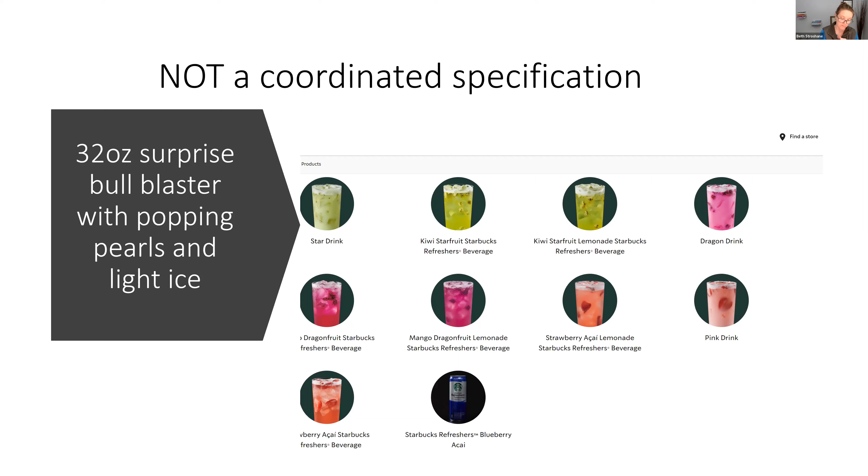It's one of those things that's going to stick in your head forever: coordinating specs and drawings is just like playing Go Fish with a toddler. No disrespect meant to anybody in this industry. How do you win at Go Fish with a toddler? You find all the matches. That's how you win. Doesn't matter whose pile they're in, doesn't matter if you find all the matches and none of them are on the floor.

So how do you get there? You say, architect, I have a spec—you have to read 600 pages to find out which fish I have. And then the architect says, okay, here's my 700 pages of drawings, find my fish in those.

So really what we do, and every spec writer has a similar process for this, is how do we play Go Fish with a toddler? We play the cards face up. Like, here's my table of contents, and these bluefish, they usually go in the tile section—do you have any bluefish? Yes, I have bluefish. Okay, how many? Four, big ones and little ones. Excellent, so we've got those matched.

And then we move on to the next thing, which is doors. Oh, I have big doors. Okay, got big doors, little doors, doors that open and close and swing in and out.

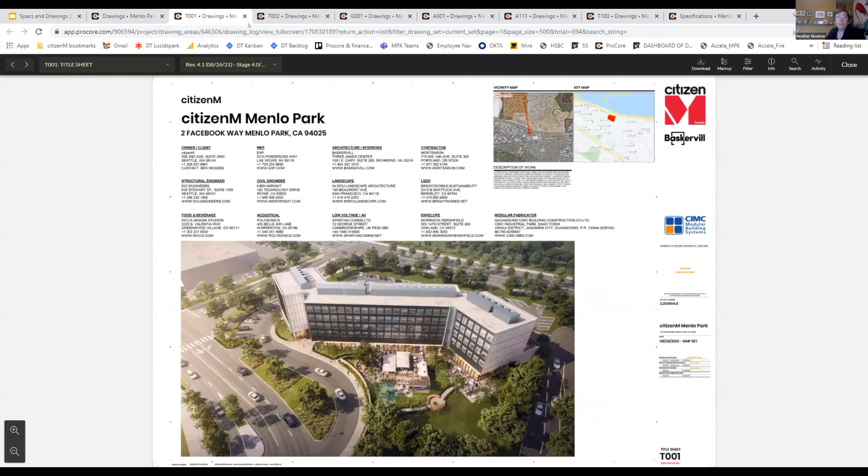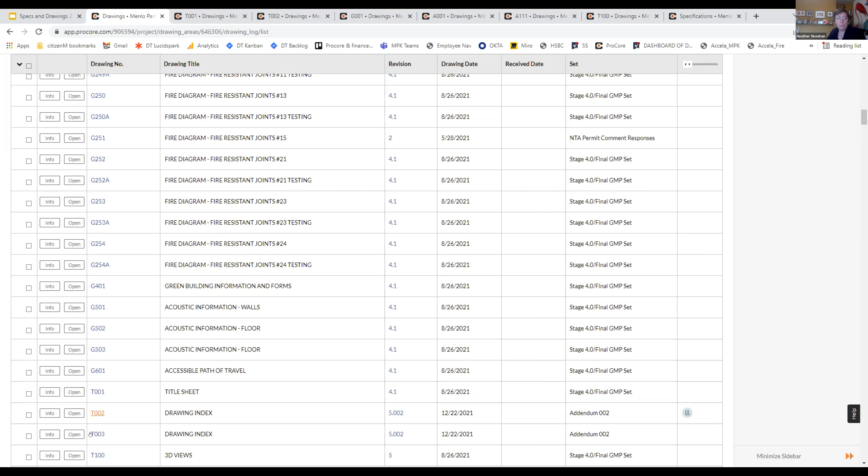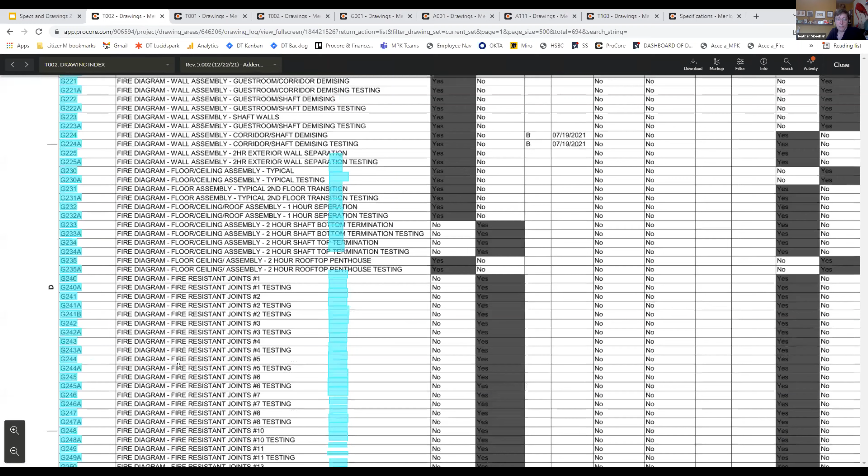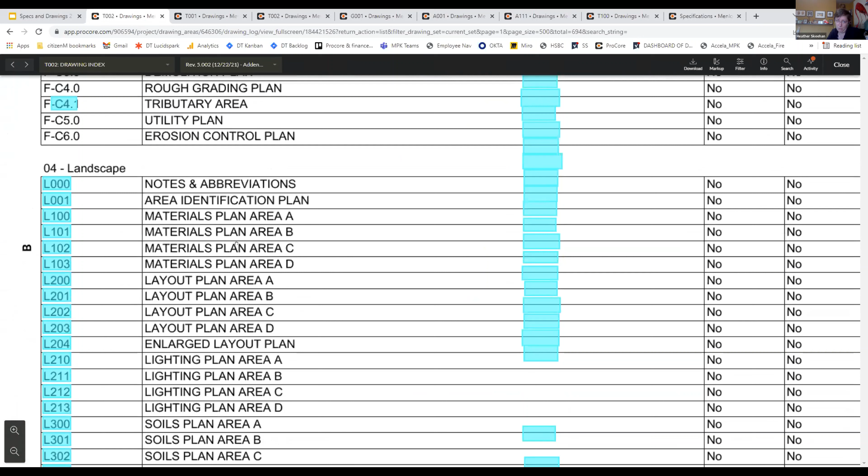And like I mentioned, there's a lot of them, so knowing your way around can be a challenge if you don't know how you're doing it. The good news is every project has a title sheet - oh, that's one of these, see, I don't even know where my title sheet is. Every project is going to have a drawing index, so if you really want to, you can go straight to the drawing index and go down the list to try to find the one drawing you're looking for amongst all those fire diagrams, because one of those is bound to have something interesting - and dig and dig and dig. So there's always a table of contents option available.

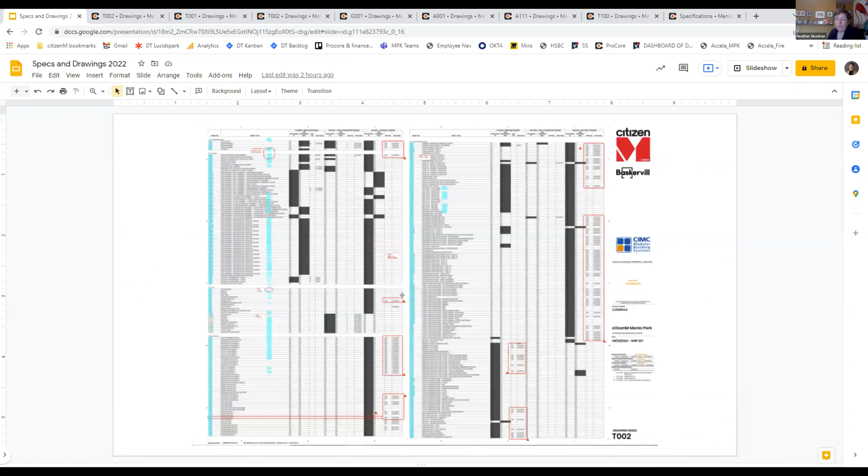Now, what's nice is that there's a cheat sheet on every set of drawings. Down at the bottom, you're going to have a little reference to all this information. Many design firms will have a cheat sheet on one of your sheets that explains how you navigate around. Looking down at the bottom of your title block, which is so much more useful with a big printed set on your desk where you can just flip through the corners, it'll say if it's A, that tells you what discipline it is. If it's 0 next, that's your view type—general, schedules, plans, elevations, details, etc.

Then it'll have the view type modifier to give you more information, and it'll have the sheet sequence right there. There always should be one. We very much like it when there's a cheat sheet built into your drawings. In this case, my architect was fabulous and put it right in the first few sheets of the drawing set. Makes it easy for me to figure out what the T or the P at the beginning means. So I can always find it that way.

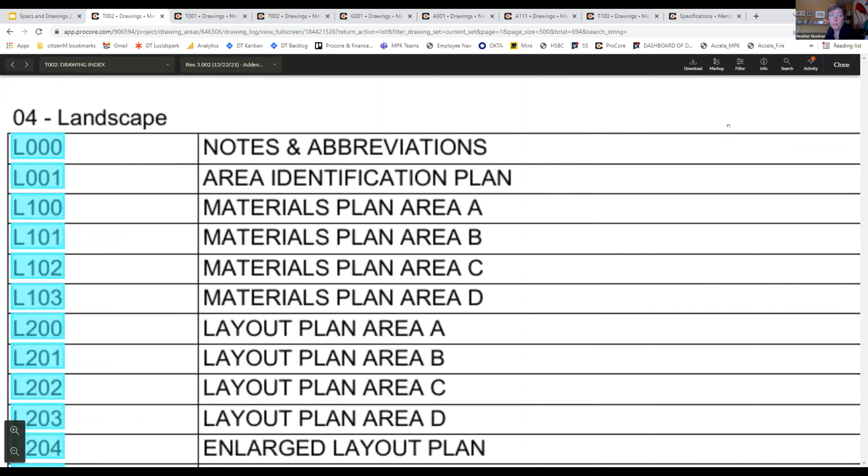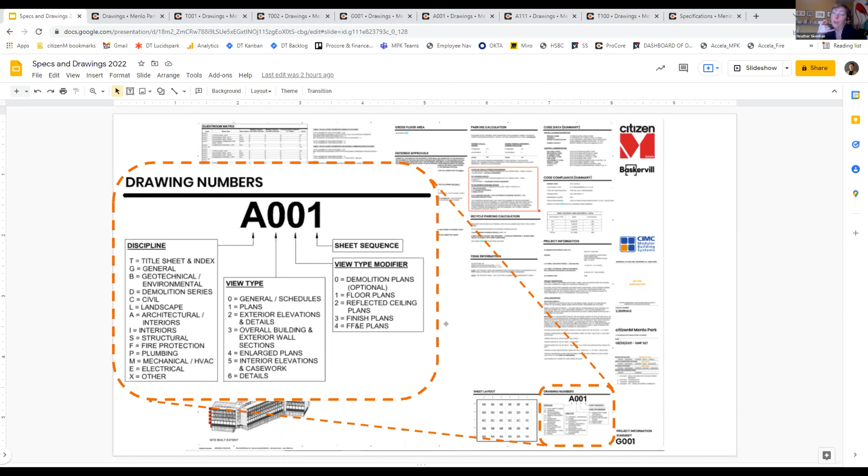Now what's also interesting is increasingly we're using systems like this—this is Procore, one of the drawing tools I use. Even more so now, if you have a design team using a tool like this, I love just searching for furniture—I apparently search for furniture a lot—and I'll search for things. This is another option that's way easier if your team happens to be using it; you can always find your way around right here. So that's the first thing you need to be able to do, hunt it down. If it's confusing or not matching up, a call to your architect is the best thing you can do, because if you're lost, I assure you they're lost too.

There are national standards that exist out there—national CAD standards, AIA has standards, and that's great. But there's also firm standards, so ZGF has slightly different standards than maybe Gensler would. And owners were really problematic—we have standards at citizenM that vary from country to country that we're working in. Microsoft has extremely specific standards; they say you will use these numbers, and you end up with a drawing number that's like 6 digits long. It gets really enormous. So it's going to vary a lot.

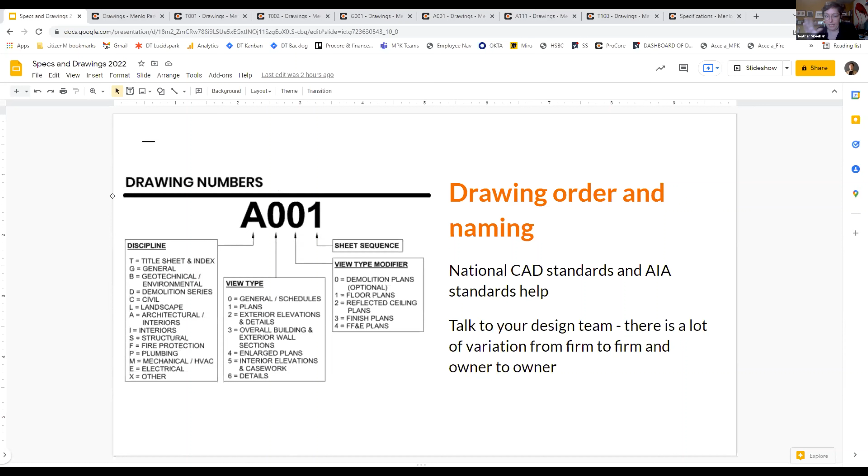So I wouldn't worry so much about national standards, and I'd always hope you have one of these cheat sheets in your project—it'll help you endlessly. That's how you find bits and pieces of stuff. Once you know where to find the architectural drawings, where the civil drawings are, and the basic format and order of these things, the next thing is what types of drawings there are and what they're for.

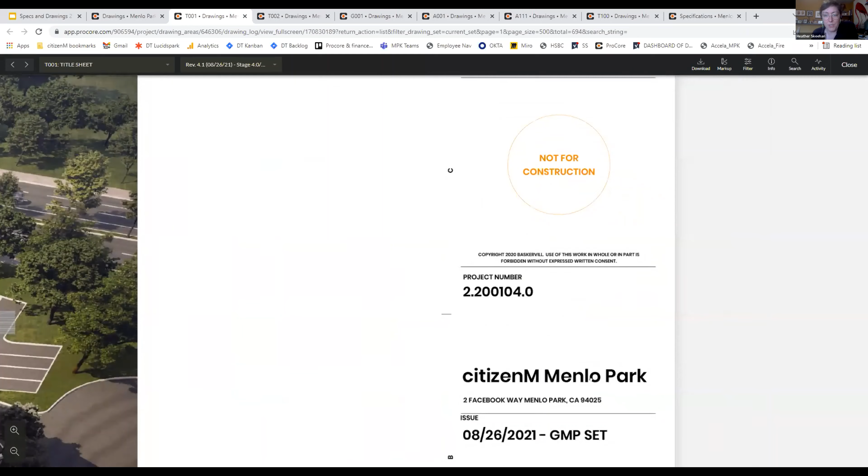All of them are going to be set up in basically the same way. You're going to have a sheet that looks like this, with this big area over here, which we call the drawing area, that'll have the stuff. It'll have this area off to the right-hand side, unless you're a weird firm that does weird things, that'll have information about the project—who this is for, the architect, a space for the architectural stamp. I'm going to zoom in here. There'll be a space for the stamp, and there we go—there'll be a project number and the project.

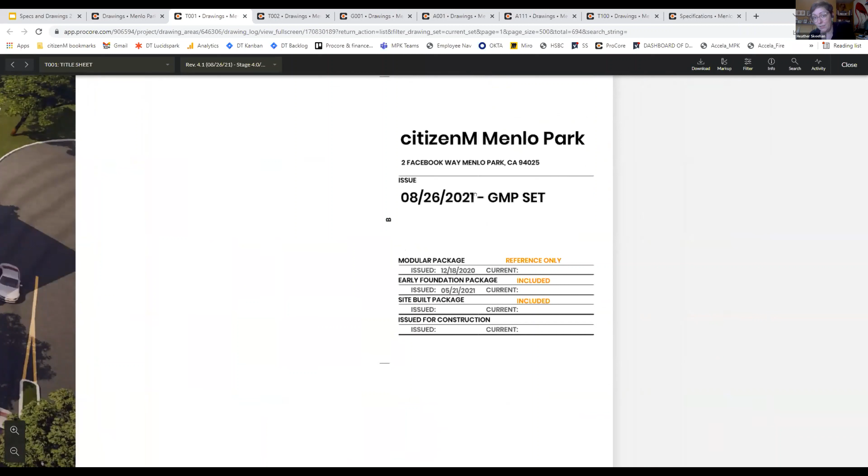Often there'll be an address on it, and it'll tell you the date this thing was issued, which is really useful—so you'll know if it's dated from 2017, maybe you're looking at an old set of stuff. Then down here at the bottom, it'll have the title sheet, the title of the sheet, and your drawing number. That'll always exist on every sheet you go through. And all this other stuff here will be what you're actually looking for information on.

So that's always going to look the same. And then when you zoom into a sheet, you're also going to have information. So this is a set of informational pieces, but when you dive into a drawing set, let me go to one of these enlarged furniture plans. This will be fun. I'll have the sheet over here, I'll have this information over here, and I'll also have in the drawing area information about the particular drawing.

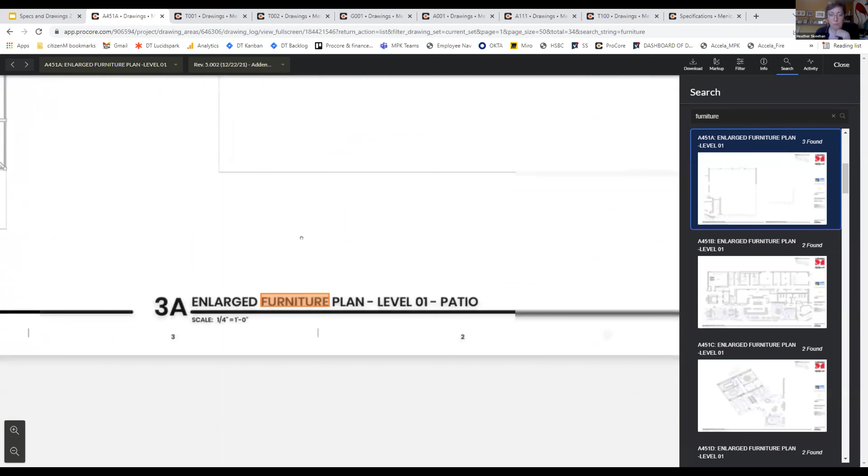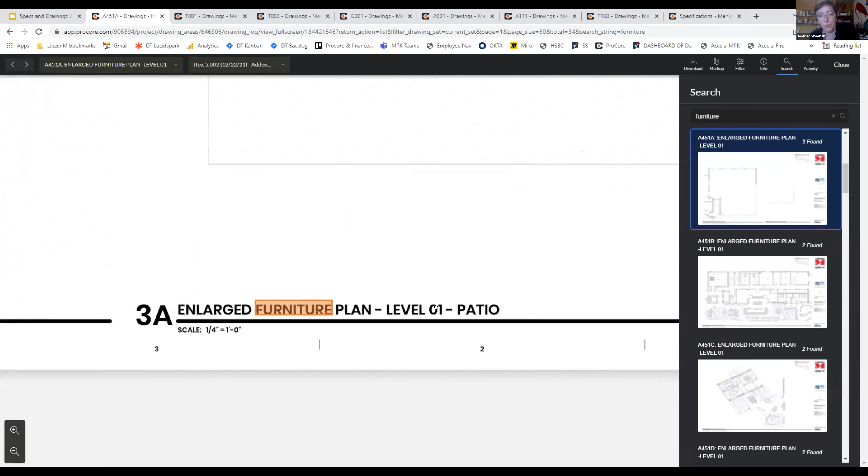That's going to have its location on the drawing, which tends to be based on a grid. So roughly where it sits within that, although that's super inconsistent from design team to design team. At least there's a number, and it'll have a title of what it is. This is an enlarged furniture plan for the patio, which has no furniture. Nifty. And it'll tell you the scale of that drawing, so you know what you're looking at here. You're going to see this on every one of these drawings.

So this guy will tell you about meeting room. Thank you. Oh God, I was like, I should know the answer to this, and I don't. I swear I've seen this building before.

So this will be your information about your sheet. This will be your information about your drawing. You'll always be able to find baseline information that way. And hopefully you have someone like Beth who can say MR means meeting room, because that can be really confusing otherwise, even if it's your project.

And then there's all these different types of drawings that get made - drawings and other stuff, by the way. Other stuff is really fun. It'll go from biggest scale down to the most detailed. So you'll always have site plans of various different types, shapes, sizes, etc. It'll show you how the building sits on the site.

You'll have floor plans - floor plans are the things people are most used to reading and looking at. It talks about how the building is configured, where doors are, where windows are. You'll have a lot of information on that tied to quantities and space.

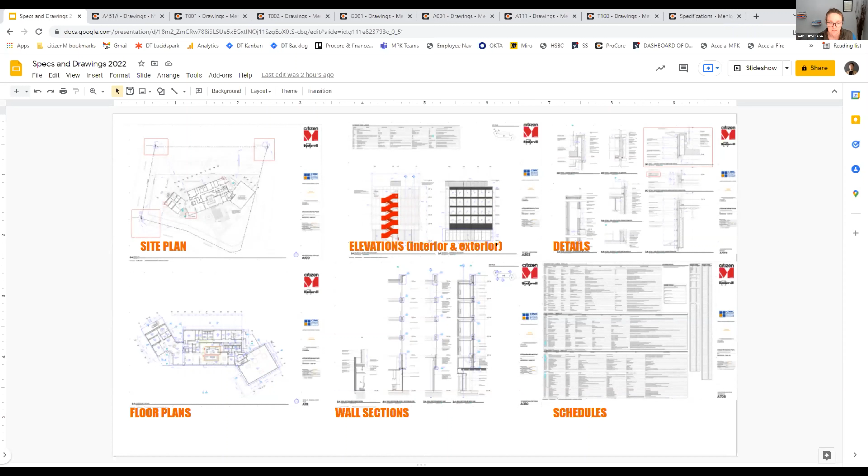You'll have detail drawings too. This tells you where you find your fish. So your Division 7 fish are in wall sections - they live in here. Your Division 9 fish are going to be in your interior elevations. You're also going to have sneaky Division 7 fish hiding out in your exterior elevations, sometimes in that schedule in small point font - that's where they are. Right up here, this is your favorite space. There's 7 of them there. There's a bunch of them.

You'll have details too. There's going to be miscellaneous stuff that's like, how does this ceiling come together? How does this particular weird light fixture tie in with this elaborate bracket that comes together? And you're going to have, again, more and more sneaky stuff.

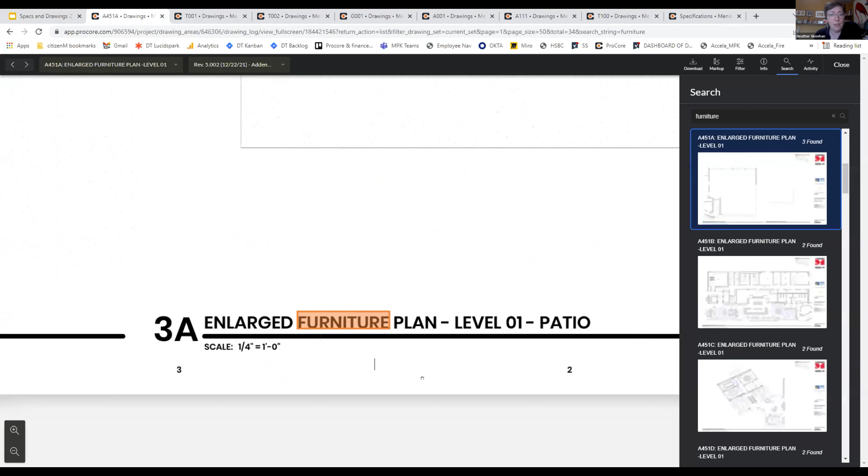So when I zoom in on one of these, let's zoom in on one of these guys. You can see tons of good stuff here - stuff that's really going to be impactful for you guys on these drawings.

You're going to have sneaky schedules like this. This is going to talk about finish, materials, different products they're expecting. You're going to have lines of annotations in your wall sections where they're going to call out the different parts and pieces of that wall. They're going to say, I've got brick, and then I've got some insulation. And there's going to be argument about where the air barrier sits, but they're going to list an air barrier - they're not going to know where it goes, but they're going to list it in there. And there's going to be a vapor barrier, and there's going to be some studs, there's going to be some sheathing, and there's going to be some drywall, and they're going to show all those parts and pieces, and they're going to call them all out.

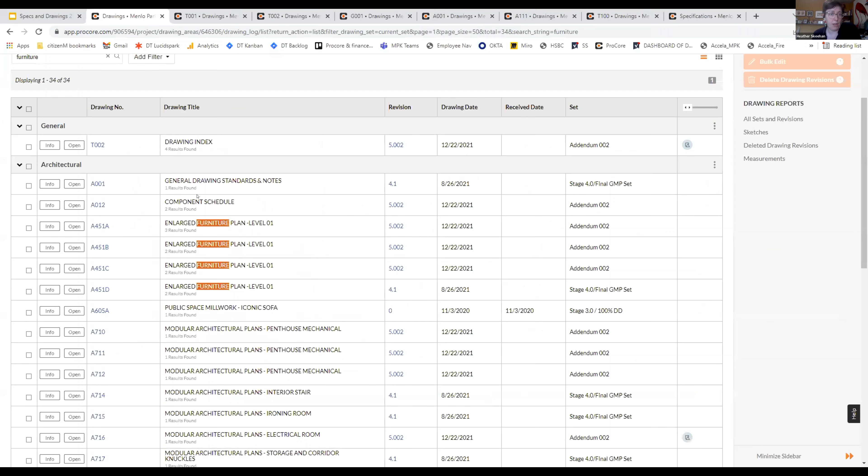Same thing with these details. There's going to be all these annotations along the side, and they show you lots of good stuff. Then you get the really fun ones, which are just whole sheets that are schedules of information. They're very dense, but have lots of good information in them. So if I go to a component schedule, I'm going to see I have a bunch of finish numbers.

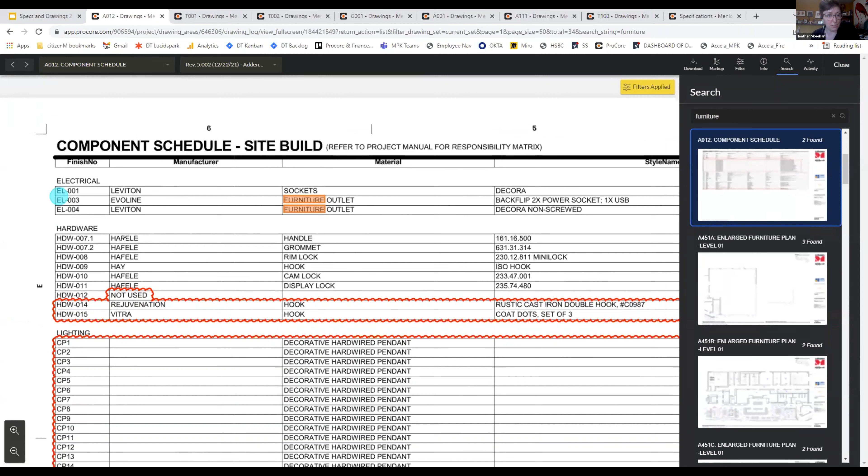I'm going to have manufacturer information in there, material information in there. This is where you can run into problems because they're listing the same stuff that exists in your spec. My architect in this case is listing this hardware group, 007, Hafele, there's a handle, even listing the style name and number. This is a big red flag for me because this information is living in two places now, because I could pull up my specs and this would be there too.

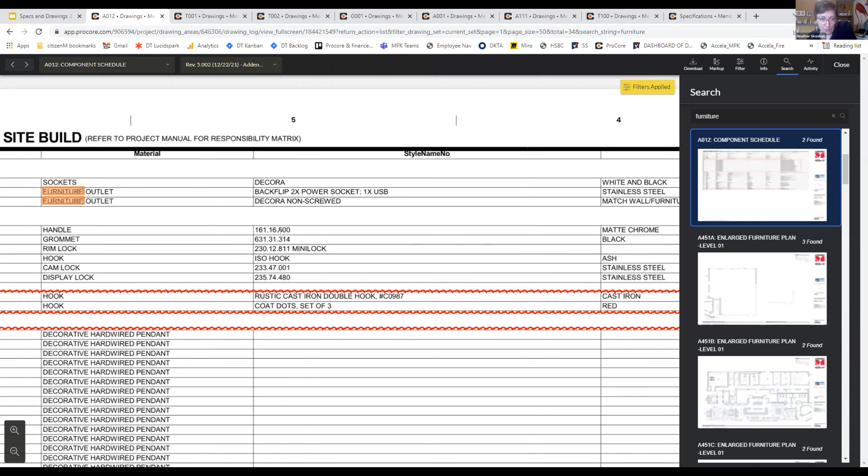And you really hope that they called their spec writer and said, hey, turns out it was 500, not 50. So that needs to update.

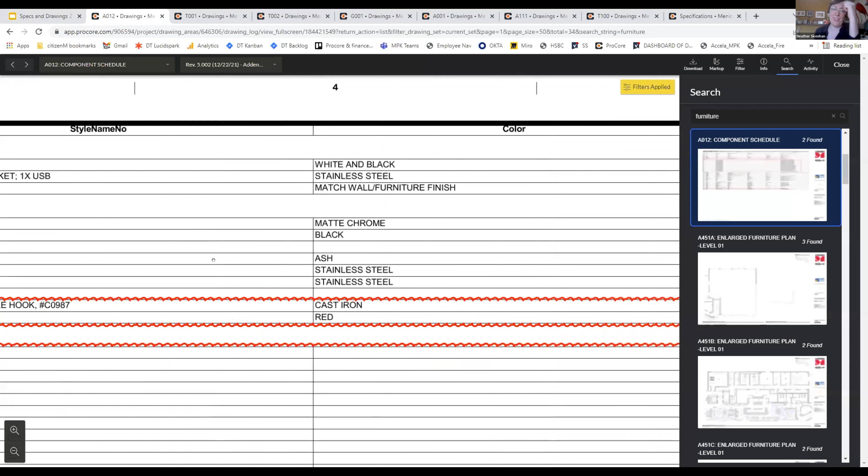So there's all these different types of things, and information is going to be scattered throughout them. Truly, it's worth going through and looking at all of these.

It sounds like a lot of time, but once you do it a few times, it gets a lot easier because there's a lot of repetition in these. Your wall sections, a lot of the same information exists from wall section to wall section. You'll get a feel for it after a couple times, but do not skip reading annotations.

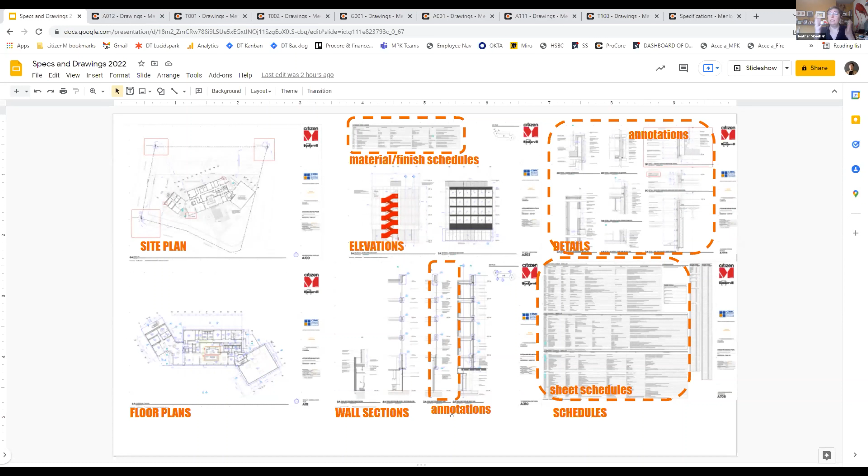It is amazing the product information we sneak into these. Like, oh yeah, I actually listed this as red brick in this one detail here, and I don't see that anywhere else. So these are your favorite. This is the most important place ever.

There's also a lot of symbols and stuff we use in drawings that, when you go through training, as opposed to spec writing, we have lots of training in how to do this, good, bad, or indifferent. There's lots of symbols that are very standardized, little guys that look like this, little things that look like this, little dash lines that go around stuff. Sometimes they'll look a little different, like maybe they'll use an octagon or a square.

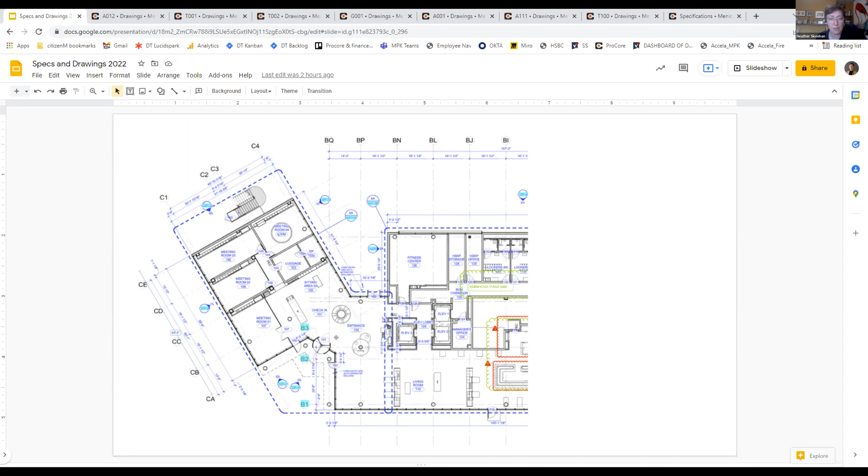This is where a strong design team will tell you what all those symbols are. You can learn the basics of how to look around and say, this is pointing at that wall, that's going to be an elevation of that wall. That's your general approach, but you can always confirm it. Oh, see, I hate saying always. You can usually confirm it in a drawing in the set of documents that talks about your symbols, and it tells you what everything is.

Engineers are very good at including these as well, because they'll have weird symbols for a light fixture versus a security camera versus a sensor of some kind. They'll have their own symbols and parts and pieces. This will tell you what all those things mean. And they'll also have all your abbreviations. So I bet MR is in here somewhere. If it's not, I'm calling Baskerville after this and saying, can you add MR to your abbreviations list?

You don't have to memorize the alphabet soup we use in architecture. And if you do, they won't use the same ones in the drawings, so don't hurt yourself. Yeah, don't do it, don't learn it, don't memorize it. It takes up space that could be better used for childhood memories. Definitely don't waste the time.

It always exists somewhere, and you can always have them produce it for you. Often you'll have a material graphics thing that will show, say, we're generally using this hatch or this look to represent this material, although they're not always super consistent about that.

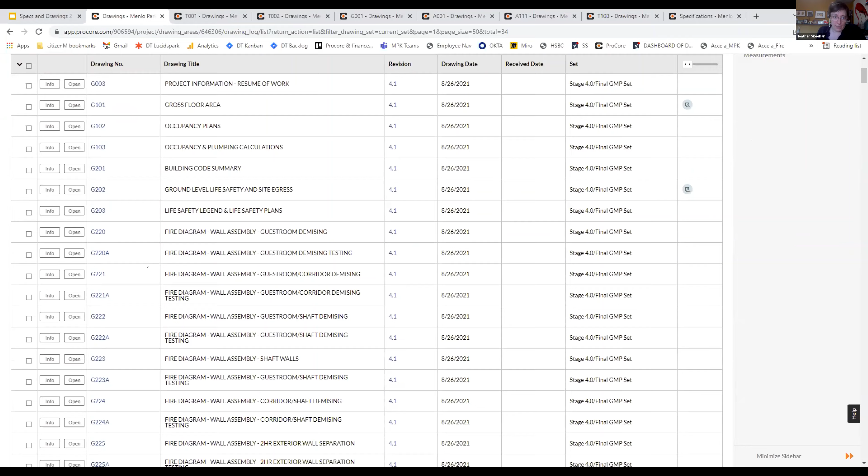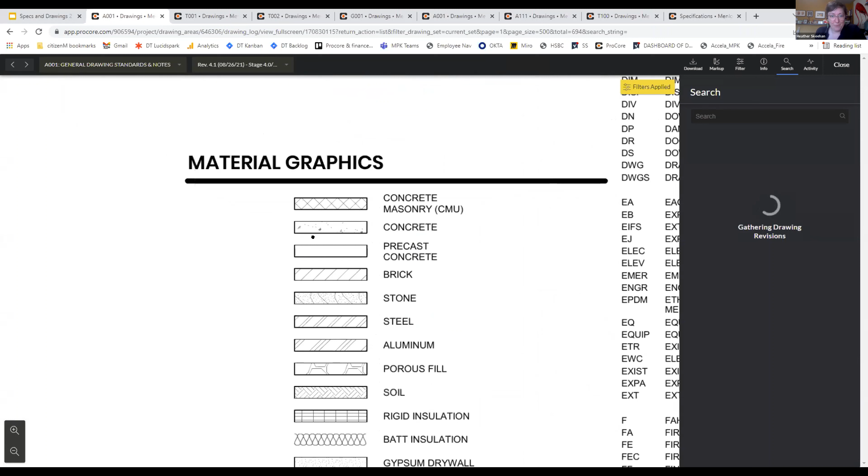Take as much as you can from that, but sometimes it will look different, which is why annotations are your friend, because that was A001. Let me look at A001. I doubt if they're consistent about their materials. Oh yeah, they're not consistent, I can think of examples. They'll generally say, in general, I want my concrete masonry to look like this, my concrete will look like that, my precast will apparently just be white, which is not confusing at all. But they'll say what they're aiming for, so you can at least get a graphic sense.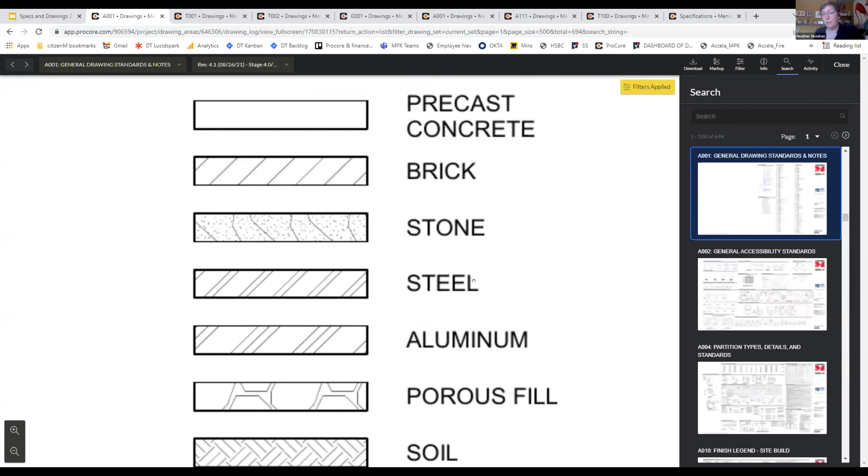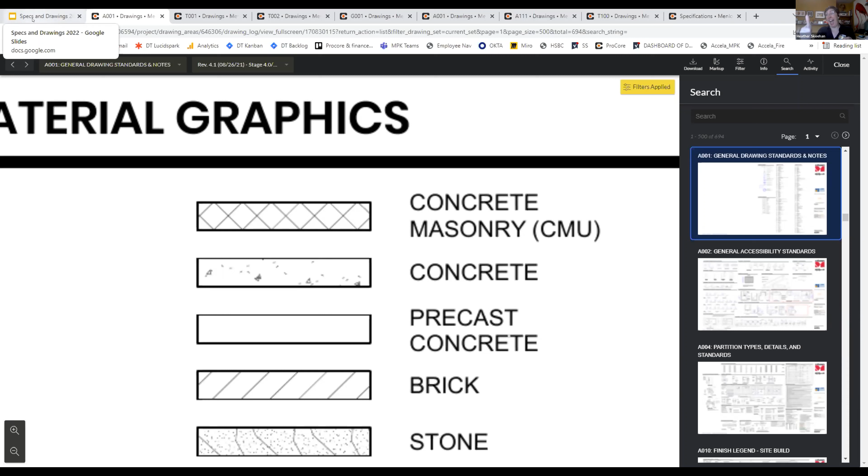But again, sometimes you'll get things that look different, so I'd always look at the text next to it. Yes, because typically that first one is foam insulation. This is why it's so important to just see what the design team has said they're using, rather than assuming from past projects, because if you change architects, or worse, you change owners, sometimes we drive stuff like that too, which is great. Or you get a product from overseas - that's even more fun.

So I'll dig a little bit more deeply into what some of this stuff looks like. Plans and elevations, these are about configuration and quantity of stuff. So I'll see, where's the building on site? I'll see how do all the parts and pieces come together? Where are doors, where are holes, where's, here's a revolving door - where are my parts and pieces? I'll see this in my plans.

I'll also have reflected ceiling plans, which is everyone's least favorite type of drawing, and shows what it looks like up there. It says, I've got a ceiling. I have it hatched in that way, which they don't call out, which I'm assuming is on this list as gypsum drywall. So it's got a hatch that matches that - it's got a gypsum drywall ceiling.

It's got all of these dots and figures and little security camera things, which there's a little legend for what all those things look like on the reflected ceiling plan. So you don't have to remember that this weirdo looking thing is a security camera - you can see that it's good. I was worried that security camera is going to be wrong. It'll say this weird looking thing is a security camera. So they'll tell you on each drawing what it is you're looking for, so you can see what everything's looking at there.

Sometimes just these legends can tell you so much about the kinds of things that need to be specified, because you'll know that there will be 2x2 light fixtures, I'll have 2x4 light fixtures, I'll have recessed cans, strip fluorescent light fixtures. You can kind of go down that list and say, I should have at least these things, because they're listing them in my legend - there's a really good possibility they'll show up.

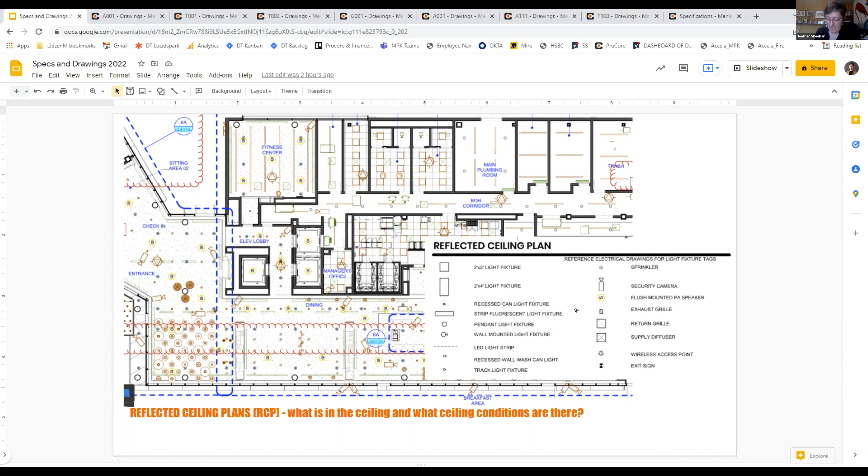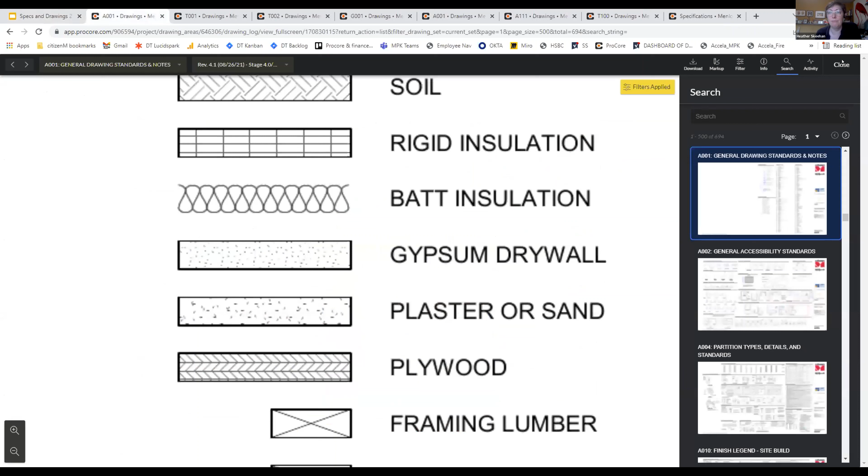It could be a nice back check. Exterior elevations is what the exterior looks like, so often we'll put schedules like this, and it'll say things like, this is the number that we're referencing things. How about I just go to it? Let's go to overall floor plan, and I'll click on a random elevation. This is why I like Procore, because I can just click through the drawings in a nice way.

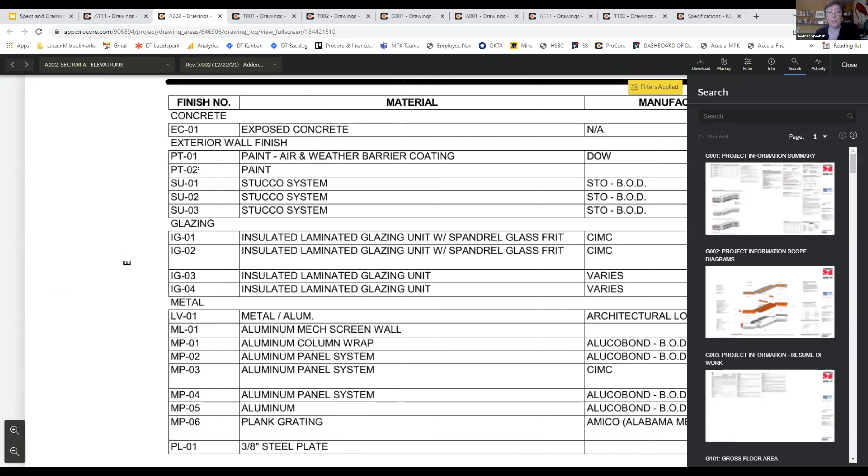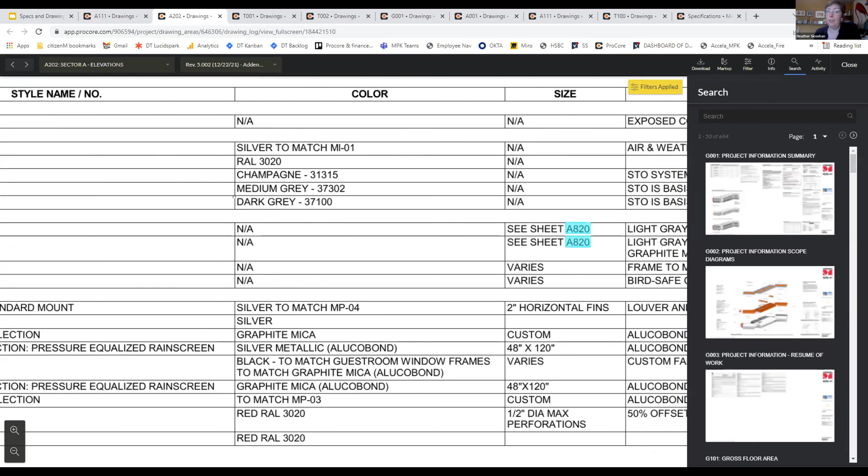So it'll say, here's the finish number, here's the type of material it is. So I've got a stucco system. This is where there's lots of conversation with them about what do you mean by stucco system? In this case, they're listing the manufacturer right here on this list, including the style name and number, color, which is very lovely, including the color numbers. So there's a lot of information that lives within this that needs to live in the specifications and needs to coordinate with the specifications.

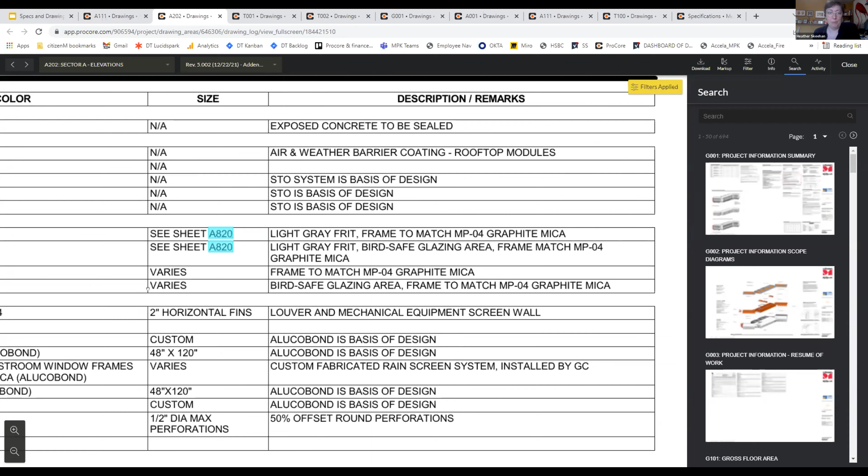So that's what they look like. Interior elevations are really, really similar - they're just looking at the inside in a flat 2D projection. So you're just saying, here's all these parts and pieces that live there, here's all these notes. These ones tend to have less.

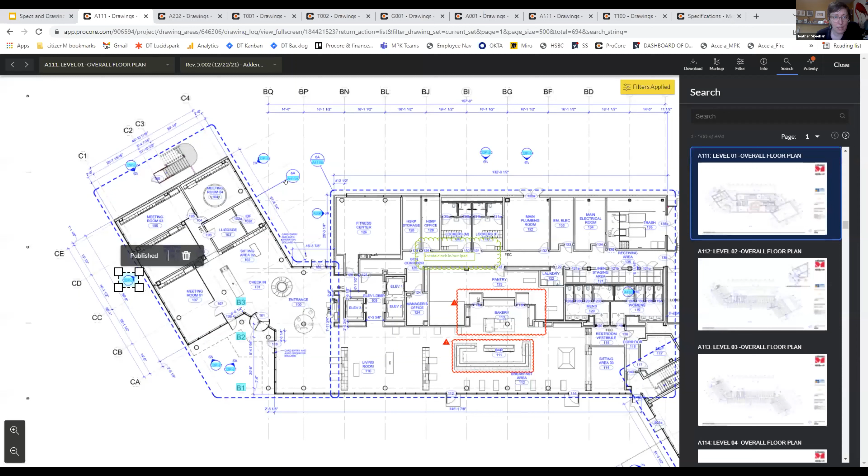Architects generally, even though these are extraordinarily important because it's how you experience a building in many ways, there's often less annotation on these, but a lot of interesting visual notes on them, just visual graphical information. Like you're seeing a lot of hanging stuff on these drawings that is really useful. So I'm going to enlarge plans.

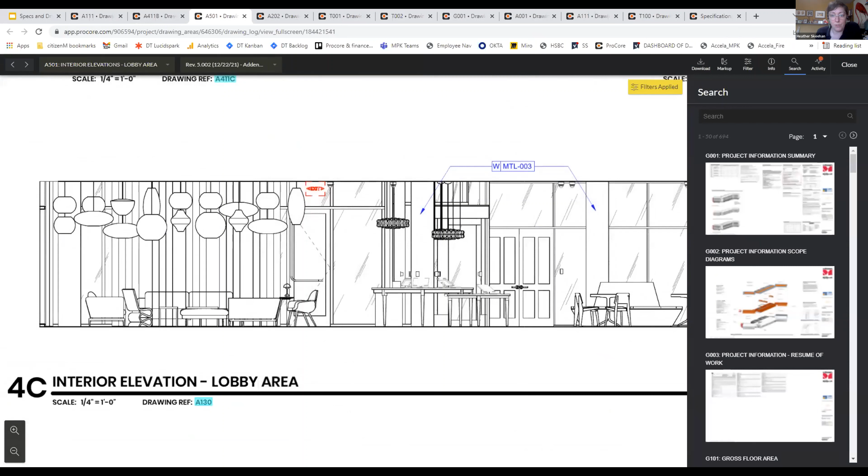So I'm going to click on one of these. I've got these interior elevations to the lobby. I'm seeing lots of differently shaped things hanging from the ceiling, lots of different types and shapes of tables, more really weird light fixtures, and these doors.

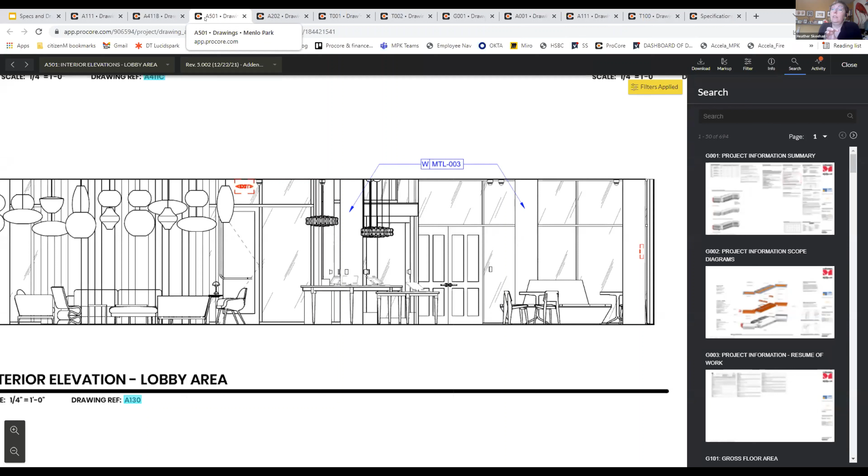So you're seeing a lot of things in here that aren't labeled, but will be labeled somewhere else. You're also seeing them call out some things, like 'metal 003.' There's often a lot of these, and a lot of them are very graphic, so they're useful for understanding what they think it's going to look like. But sometimes you're just drowning in information.

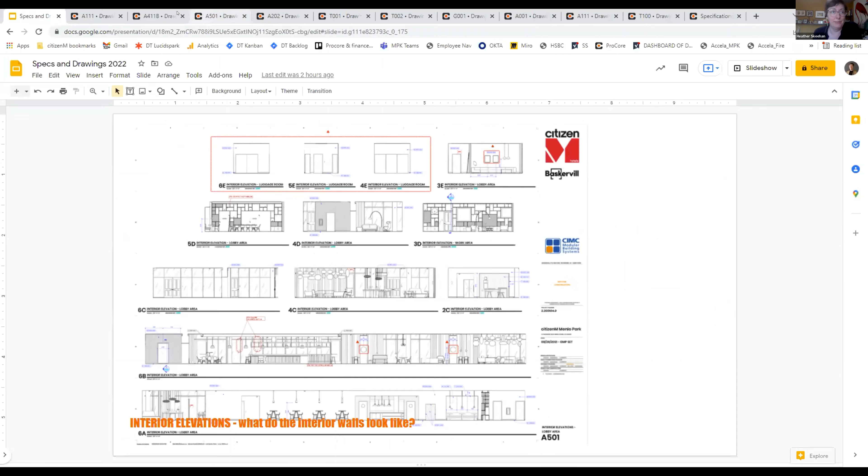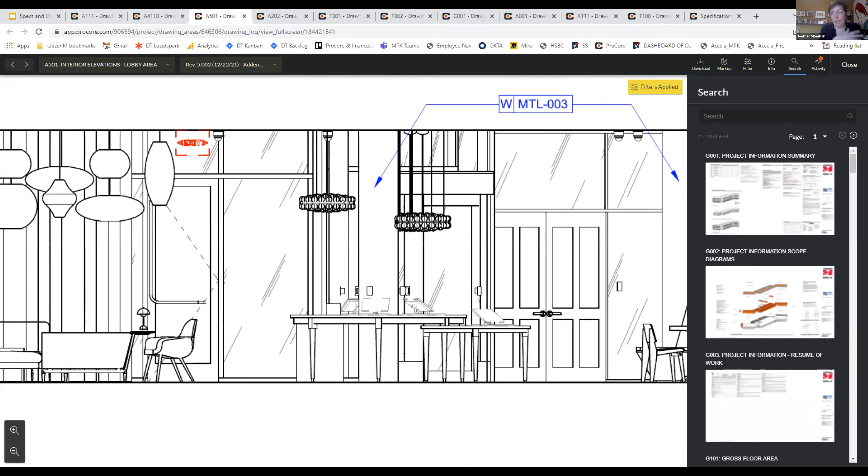This is one of those places where you find lots of things you don't even know what they are. So you make a note: what is the metal thing you're calling metal 3? Like, oh, does that mean a column cover? That's where it helps a lot, just working through, making a list and seeing if you can make a match. Sometimes I've worked with spec writers who go through a printout and highlight things they recognize, and things they don't, until everything's covered in yellow. It's a really interesting way to work.

So that's interior elevations. Then you'll get mixed sheets, which have all different types and pieces. Owners love these, we're huge fans. Sometimes we'll make more comments on these kinds of sheets because we're seeing things in different ways and parts and pieces. We'll say, yeah, I know it's just orange graphically, but I actually want those things to be blue. We'll say that in a weird place, so we can be really challenging as an owner.

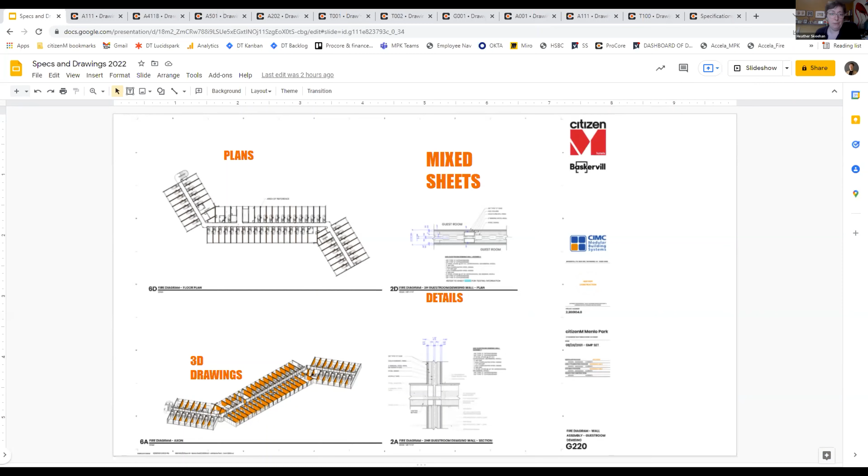Details and assemblies are a whole series of drawings about how we expect the building to actually get built. Our wall sections are our jam. The annotations tell you so much about what we expect to be built, and often we'll have conflicting information from the specs. Air barriers and vapor barriers are one of the big ones. Sometimes we'll have a line placed where it looks nice graphically, but maybe that's not actually where the air barrier goes, or where that particular piece goes based on the product we're specifying.

So sometimes you can get different kinds of information in these drawings than is actual reality. If something doesn't make sense in these wall sections, raising your hand and speaking up and saying, hey architect, design team, this feels weird to me, is hugely helpful. It can make an enormous difference. Don't be afraid to ask questions about these - it can only help.

As a quick note, see the little dotted lines with the square? If you're not familiar with drawings, that essentially means pinch and zoom here and go to that page and it will show you bigger. So that's what those dotted lines mean. We can show you that right here - all these dotted lines mean we acknowledge we drew this tiny, and if you need to see it bigger to understand what's going on, go to this other page. That's how the drawings link together.

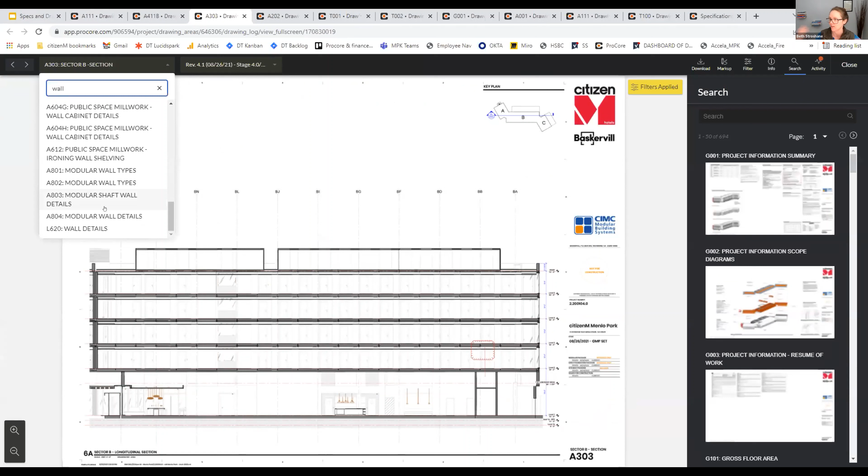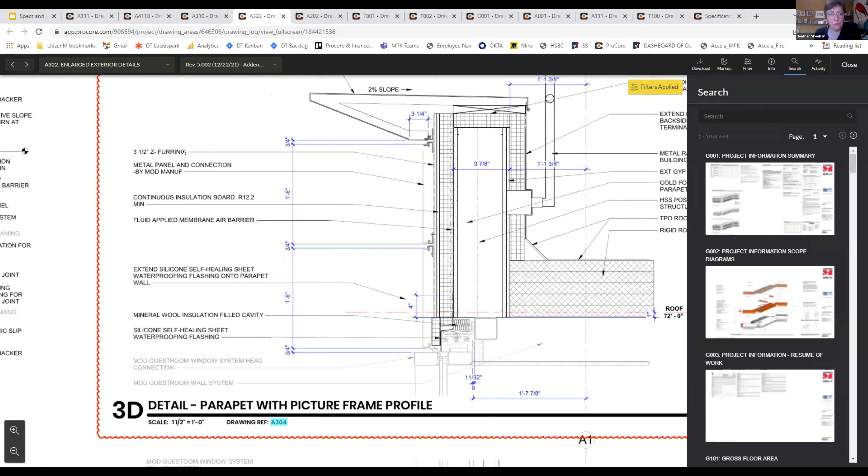So I'll go to a wall section, one of these guys. You'll have all those dashed lines saying, here's basic information about that assembly. If you want to see more, it'll live on sheet A322. Then I'll zoom in and see a ton more information - this is metal panel, this 3.5-inch Z-furring, see there's that air barrier, though who knows which line they're pointing at. There'll be information about all the parts and pieces as you zoom in more.

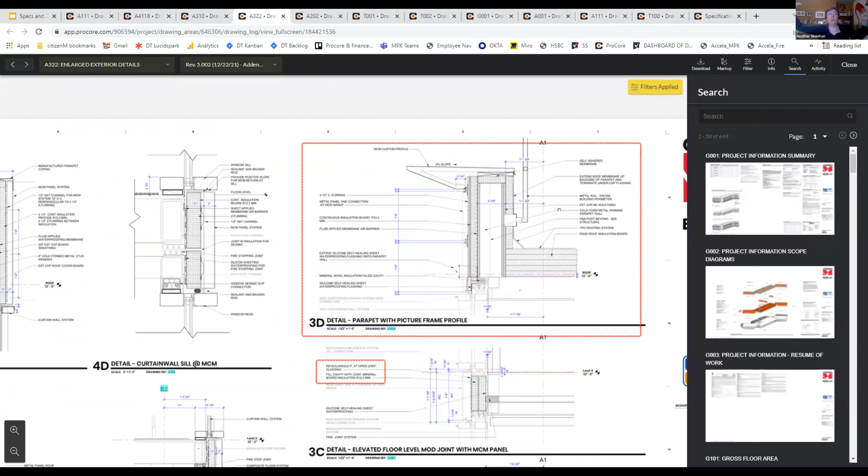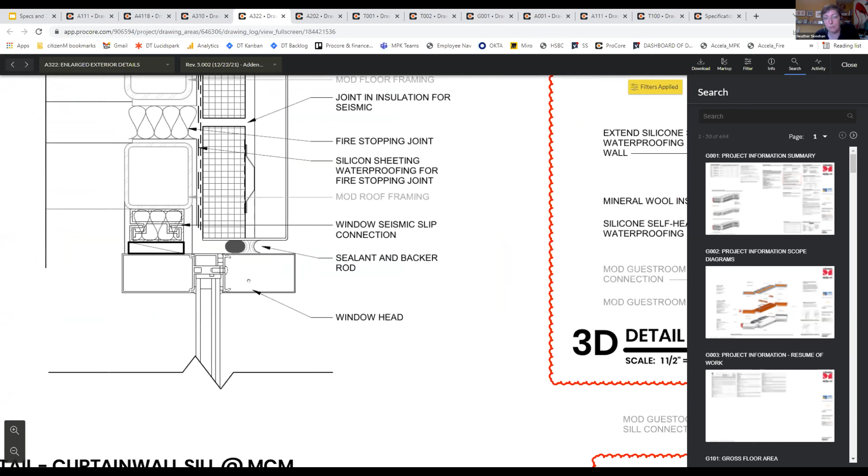So you always start big, at a big scale where you're seeing the whole thing, and then you get more detailed and more detailed until you're zooming into each layer of individual glass, its little mullion, and all those little weird parts and pieces that we show as architects because we think it looks cool in a drawing. But we probably don't call out a whole lot of information - we just say window head.

We're going to see lots of standard details. You'll see things like a detail for the threshold, a detail for the top of the window, a detail for the jamb of the window. You'll get a lot of those, plus unique items, like this weird piece of casework going next to the bar because it's super weird and it's the only place we have it.

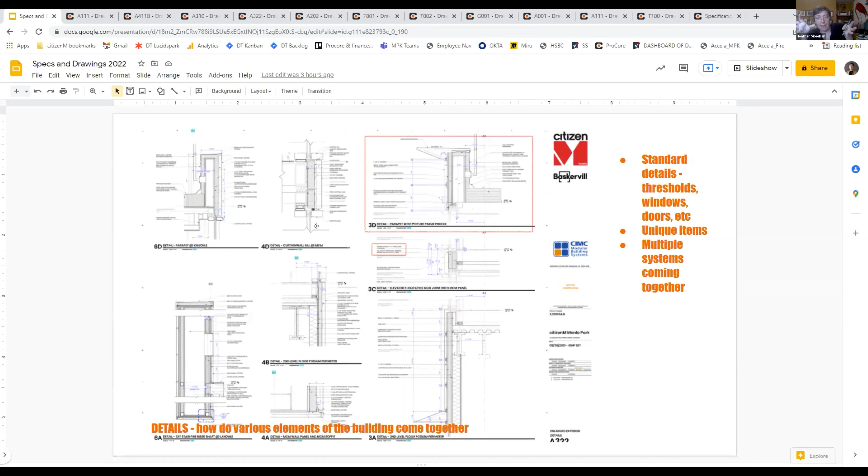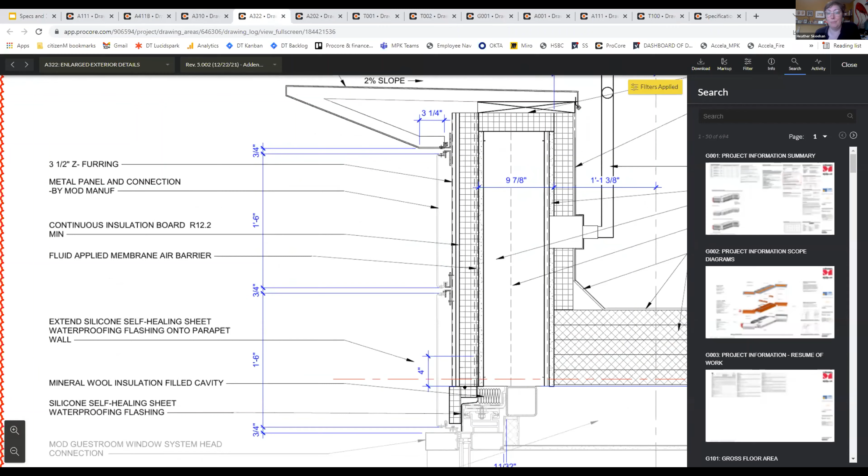And like this one we were zoomed way into, you'll get systems. I'll say here's my metal panel system, and here's all those parts and pieces coming together. Here's my insulation, here's this, here's that, on and on. You'll see that full system tying together with other systems. In this case, you'll see how they expect the tie-in with that railing around the top of the building—they actually call it out: metal rail, entire building. So they'll call that information out, and you'll see those systems coming together. If two systems come together, there will be a detail of it somewhere. Thank God.

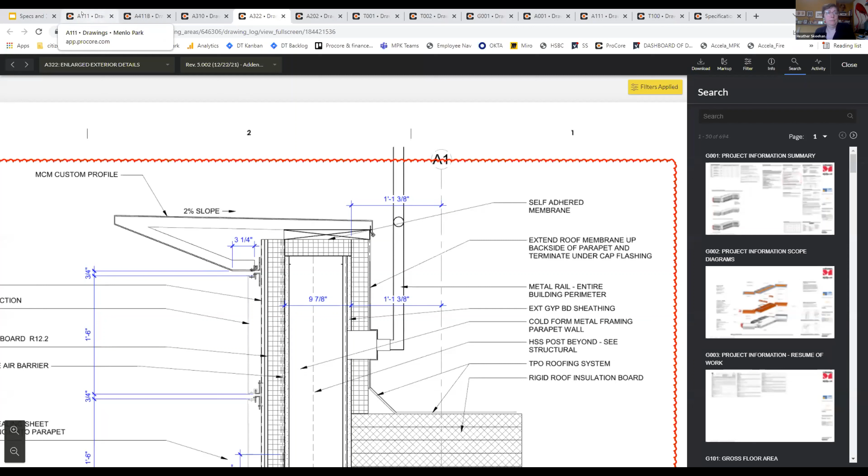And sometimes GCs will do the same thing. We'll take information that comes from here and piece it all together until we say, here's the parts and pieces we're going to build in concrete. So more and more details get made by different folks down the line, where they'll take the specification information and all these cool drawings and make more focused drawings that say, I'm going to build this concrete stair, and here's all the parts and pieces. We strip down the information until it's just those few things.

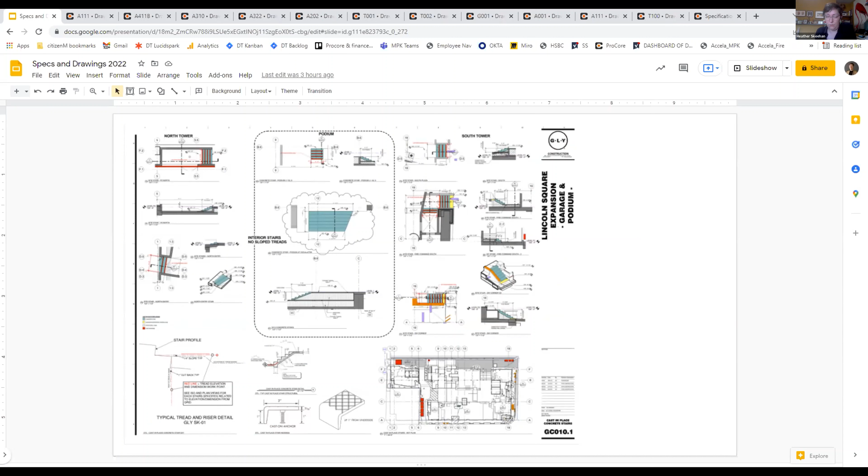Schedules—sometimes you just need a list. Because if I had to draw my shopping list every time I went to the grocery store, it would take way longer than if I just listed: I need eggs and bacon and milk.

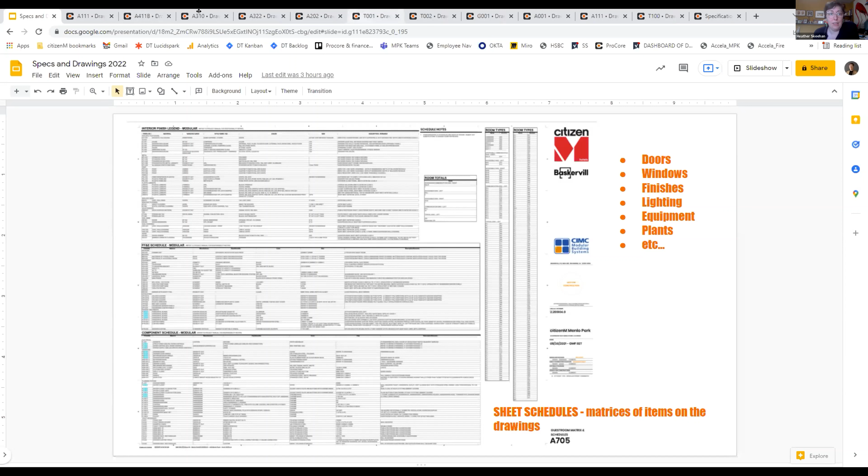So you'll get these sheets that look like this, and generally there'll be some kind of numbering system that the architect will have, along with a description of the material. In this case, which makes Beth and I a little cautious, you'll also get tons of details about the material supplier—look at that, all that nice information.

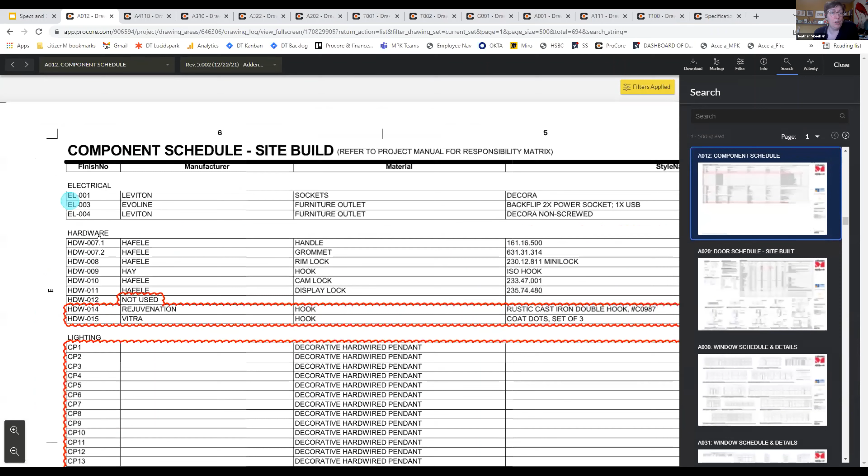Door schedules are always fun for this. You'll get lots of information about what is—if it'll finish loading—there we go. What is the manufacturer? What is the material? What is the style name and number? What color is it? We tend to put a lot of information into these that gets duplicated in your specifications.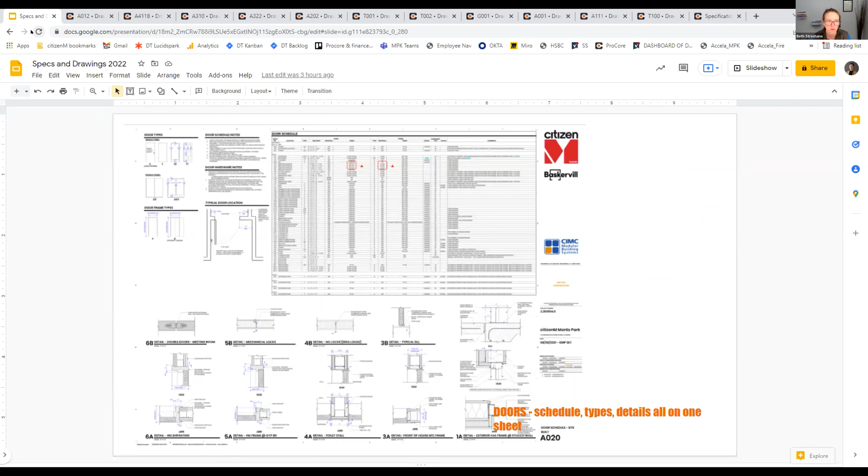Very much worth talking to your team about—usually we won't duplicate them. We'll look at this and say, okay, you're listing these five bits of information, but you're not listing 6 and 7. A classic example, and we'll see if Heather can find it, is carpet or carpet tile. They'll always list the manufacturer and the color, but they won't necessarily list the installation pattern and configuration.

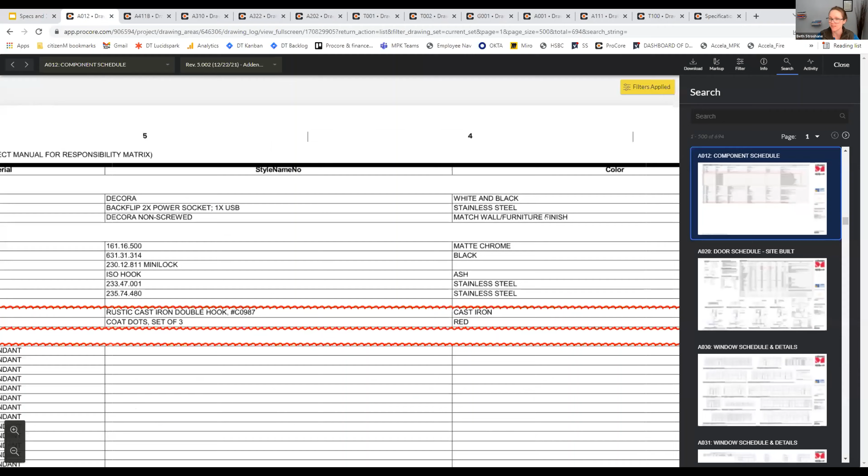Or if it's glued down or stuck down—those are the things where, as a spec writer, you look at what's there and ask, is this legit stuff, or is it stuff you made up from last time that you haven't fixed yet? Because sometimes we coordinate with that and then they change it. That's where that patience thing comes in—huge—that's where you want to coordinate with what's there, not repeat.

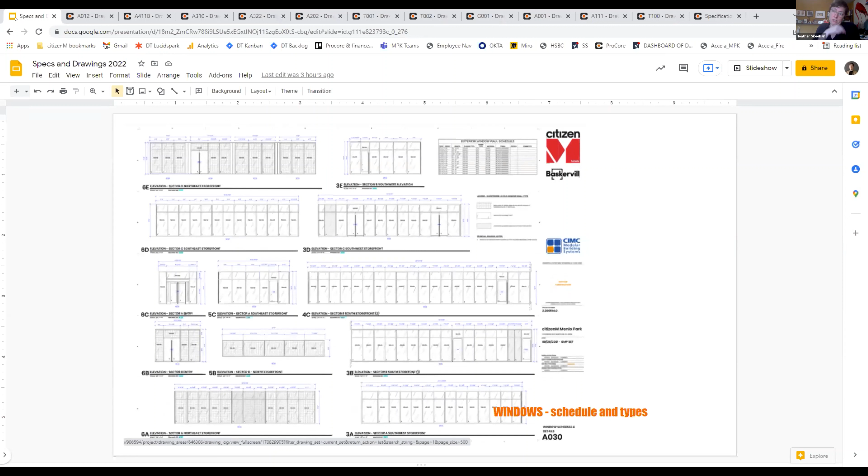Similarly with door schedules, we'll list information about how we expect it to be—black, a 2.5-inch door, a 90-minute door—but we won't list hinges, and probably won't list lock sets. Definitely we like having those live somewhere else; lock sets freak everyone out. And if I had carpet tile on this project, I'd 100% pull that up. That's a great example of we just say it's blue and starts over here, but all the rest lives as it should in the spec.

So we'll see similar things: blue, but no, it's glued down at an ashlar pattern and all of that stuff—that's what gets picked up in the specs.

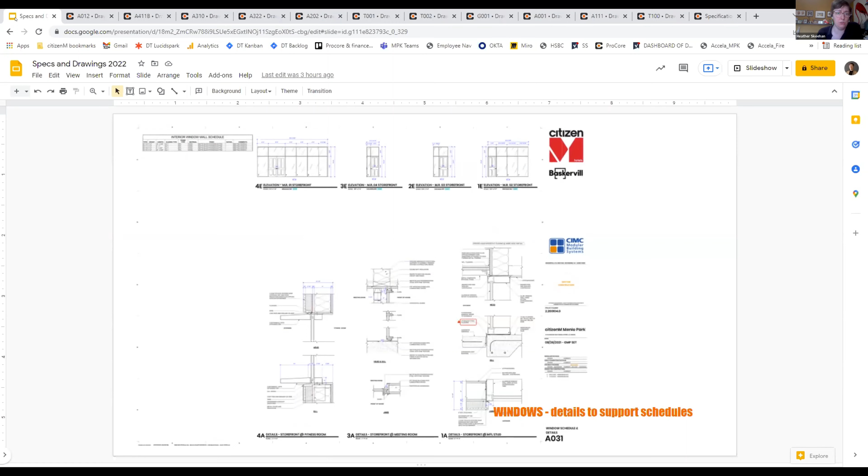So those are overviews of some of the big drawing types, with lots of stuff living within that. One crazy thing you'll increasingly run across is BIM. I've heard many colleagues say the specs are great, but how does the BIM work? Because BIM is very much how we build the sheets now, rather than a replacement for stuff.

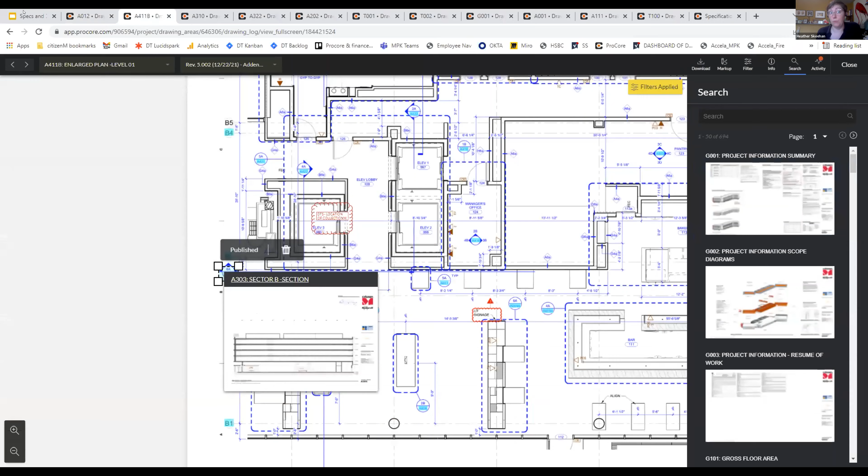So we'll have this 3D model with all these parts and pieces, and I'll produce all these great drawings from that model—slicing, cutting, and looking at it in different ways. I'll be able to link in information, possibly. The theory is you can tie it really beautifully to your specs, though I've never worked on a project like that. One day, maybe I'd like to do that.

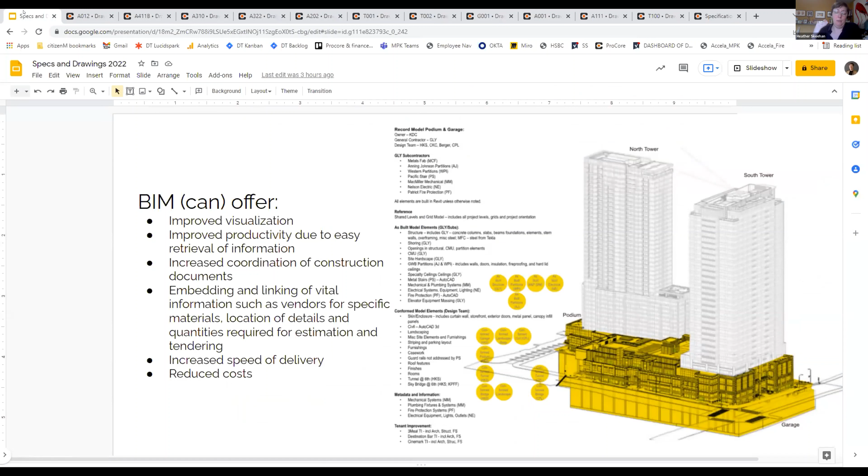But it's very much still the way we use it is very visual, about how do I build a digital version of this building before I have to build it in real life. So that's kind of what BIM is.

There's some more information in here, and I guess just some important things to remember. Project teams love the drawings, and we're really scared of specs. Specs to us make really good door stops, those books hold the doors open and closed very nicely.

But in the case of inconsistency, the specifications take precedence. If my spec says that carpet is blue and it's carpet tile, and I have a note somewhere in the drawings that says it's pink and it's sheet carpet, the specs rule, just because that's how it works.

So sometimes, in many cases, it should. It depends on your contract and depends on what Division 1 says, but often what's said in the specs is really, really, really important.

And if they're different, and if there's something the contractor likes better and is cheaper, like Beth's example of the red truck, we're going to use what's better and cheaper for us, or we're going to send a change order to the owner and say, the spec says it's this, and that's $100,000 more. So let's give them what's in the spec.

So those two things aligning are really critical, and it can be very difficult - this is that patience thing - to get your architects to take the time to really plug in with you on the spec, but it makes a world of difference.

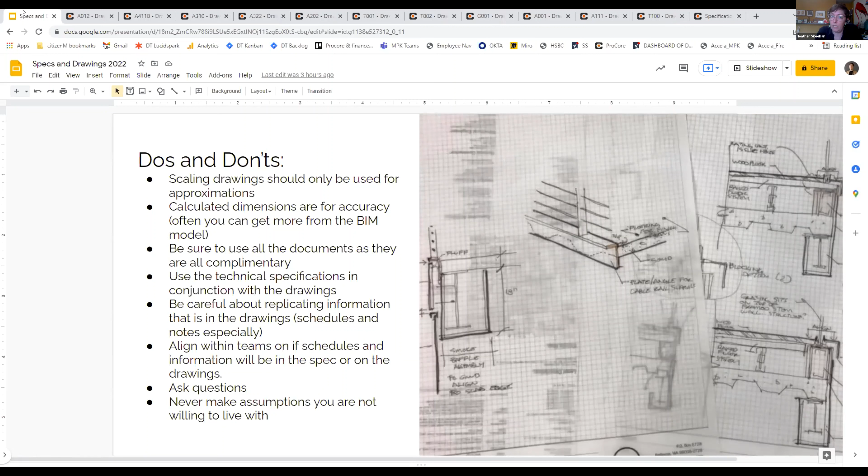The biggest thing is read the annotations and ask questions. Asking questions of your design team, even if it seems like a dumb question - like 'this didn't look like stucco in this detail' - asking that question in a design meeting recently saved us a ton of money, because it didn't want to be stucco, it wanted to be metal panel. Sometimes asking that information is really helpful.

And then there's how the GC uses it. If I have my GC hat on, we're going to use the drawings so much. We're going to do quantity takeoffs from them, develop sequences of work from them, break up the drawing sets into bid packages, create shop drawings, track changes, and walk through them with the inspectors.

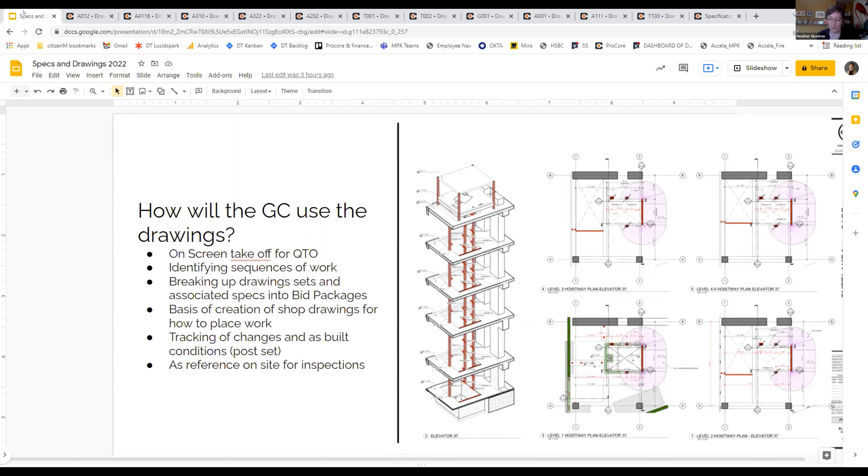You're going to hopefully not use your specifications as the doorstop, because the specifications have critical information in there. Owners like me are really demanding of our GCs to say, what's in the specifications? Please review the specifications, let's talk about the specifications. So those of us getting into that field are pushing for that reminder that specifications are really important.

Owners, we really like the drawings. Owners dig drawings. We want the pretty pictures, the 3D views, and the basic information that goes into our pro formas to make sure the money works - gross floor area, number of rooms, number of toilets, those are the kind of things we're interested in. There's like 7 drawings in the package that we're going to really reference over and over again.

A lot of it, like details and wall sections, meh. We want them to work, we want them to meet our requirements, and we want the building to not leak, but we leave the rest of it to everyone else. We're mostly going to look at the drawings and 3D views.

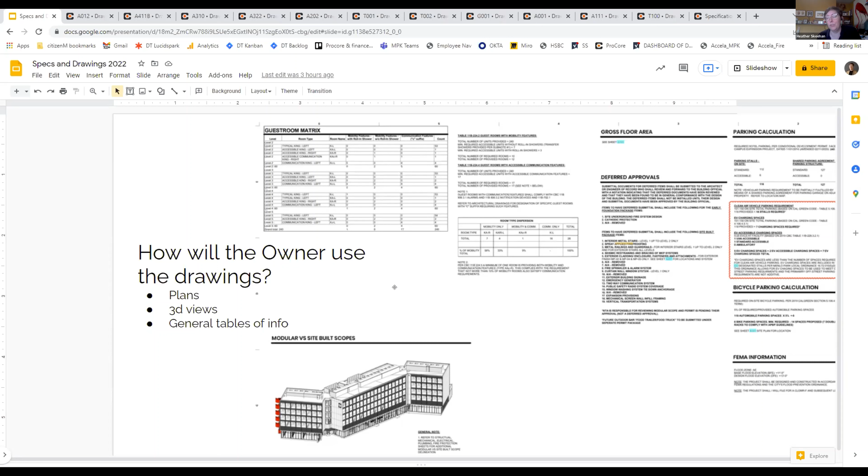There's some great resources out there for learning more. UW's construction management certification course has a drawings and specs learning thing that's separate, and it rocks. I encourage architects, contractors, and everyone to take this class, and it's all online now, which is extra awesome. So I would totally check that out. WSU, I think, does a similar one, I'm just less familiar with it. A lot of the construction management courses out there have that super great course.

AIA, we occasionally do continuing education around drawings and specs, less around specs. This is why I'm glad that you all do this stuff. We don't talk about specs that often, but sometimes we'll have someone come in and talk about drawings, talk about technical drawings, and cool ways to do drawings differently. And then page turning, sitting down and going through the drawings with your design team, is a rockin' good way to learn about projects and about drawings.

Because of the way they talk about it, they'll say, you know what, let me skip all of these 14 pages, they don't matter. This is where it's really important. You'll get a sense from them of what's important and where the real juice is in a set of documents. So definitely take that time and sit down with them and see where the drawings sing to them, because sometimes that'll tell you things that are really important, or that they don't have all worked out. Like maybe they'll totally avoid talking about the parapets because they have no idea.

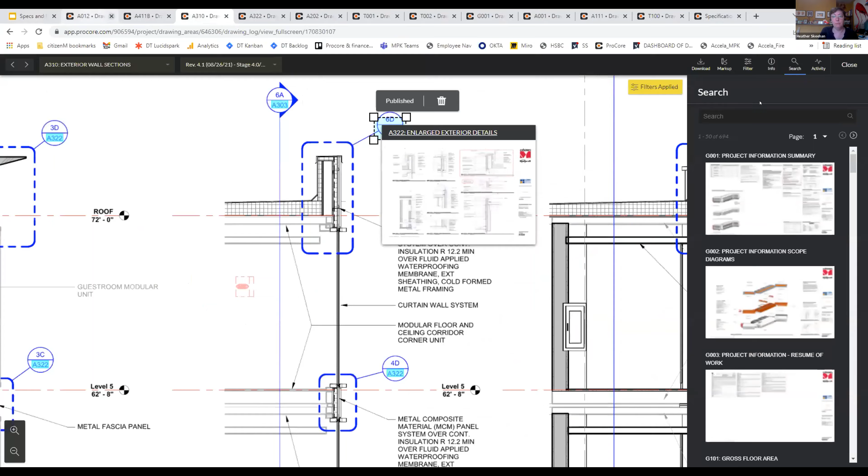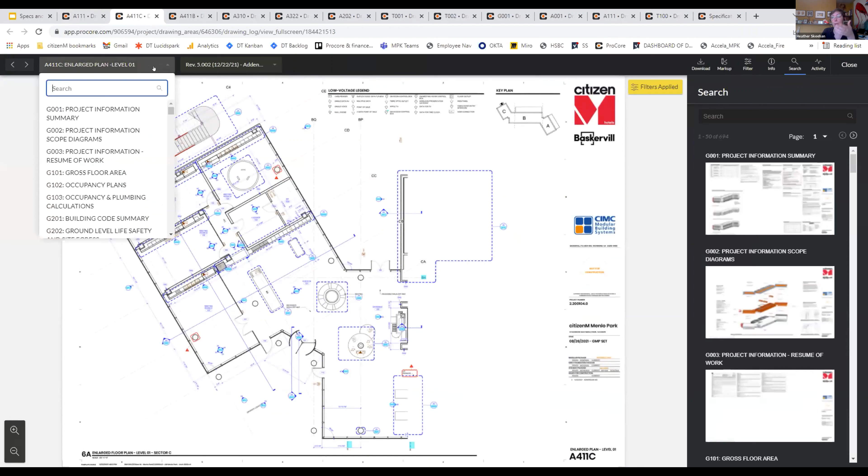Take note of any sheets they say don't matter and double check that later. If you have a big open sheet, maybe that's a problem. I know why this sheet is big and empty, but if I look at it and see how it's big and empty, I'd say, okay, what's missing? Because that kind of freaks me out. Like you're just saying there's nothing there, but are you sure? It'd be really great to not have a big thing that's missing in there. Are we sure there's nothing in there? That's a lot of space when everything else has tons of information in it.

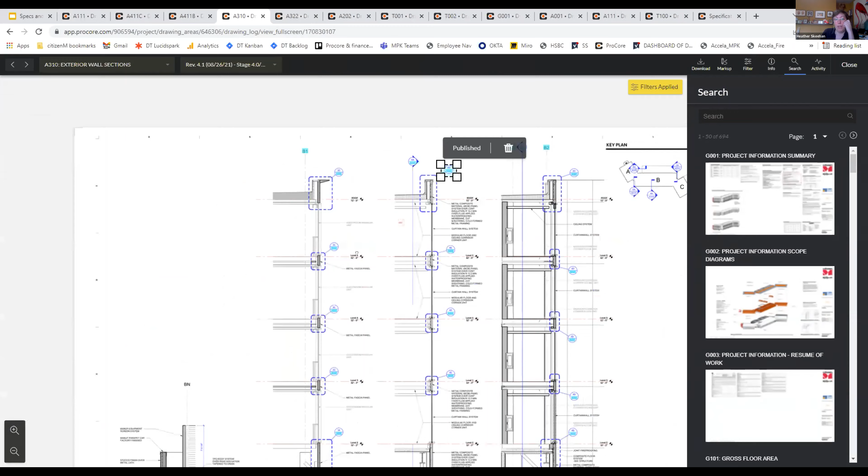So sometimes empty sheets or empty elevations are a big problem too. Or if this has no notes on it, or very few notes, it kind of makes me wonder if it's all the same notes or if there's something else I'm missing. So truly, if they say something doesn't matter, make a note and maybe double check.

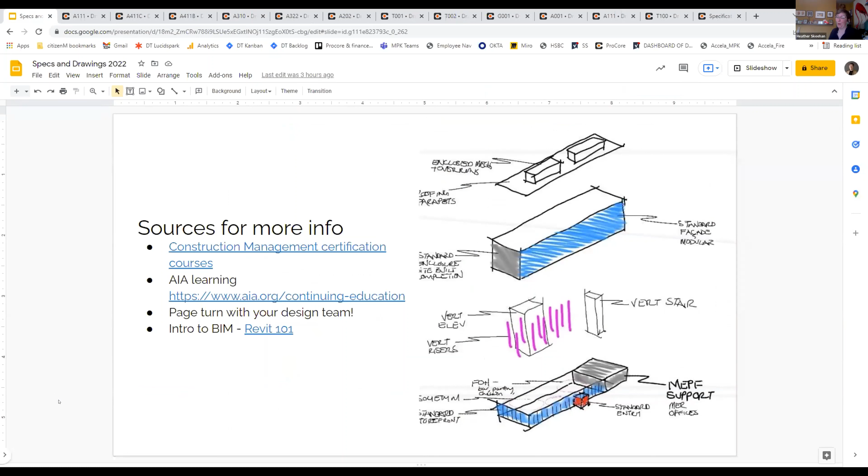There's a lot to drawings, but hopefully they end up singing well with the specs, because that's a perfect world. Every square that's in the drawings should have something in the specs. That's the thing you want, that's the go-fish game you're playing. So go through your drawings and mark up the things you think they are, and then go see if you can find them in the specs. If you can do that, great, you're winning. If you can't, your toddler's disappointed and you need to play another couple rounds.

Exactly, your architect is your toddler, 100%. No, everybody's all on the same page. Just the project is the toddler, and everybody's happy when the project wins. I love that, your project is an excellent toddler. It is. Sometimes it runs off and hurts itself, and we're all just trying to get it to the end.